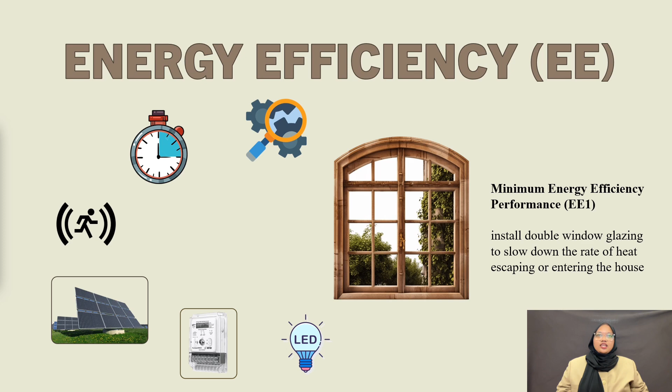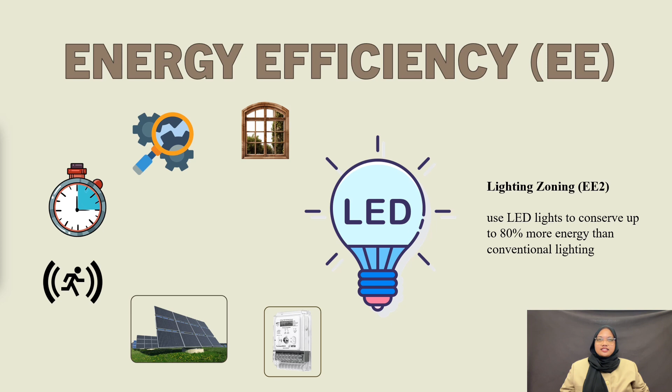For energy efficiency (EE), we will install LED lighting. LED converts a larger percentage of power into light compared to conventional lighting sources. To achieve the same brightness, they use a great deal less energy. This is because, to provide the same quantity of light, LED needs 75 to 80% less energy than incandescent bulbs on average.

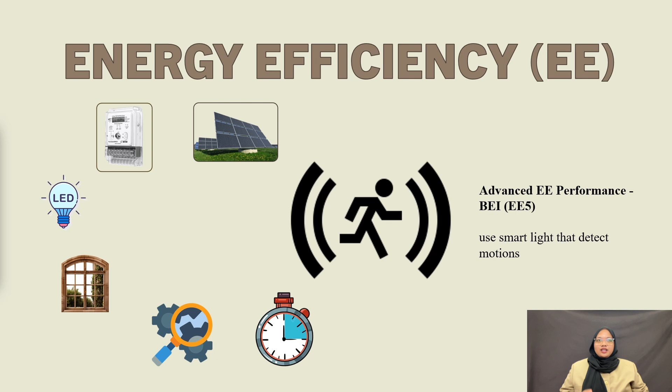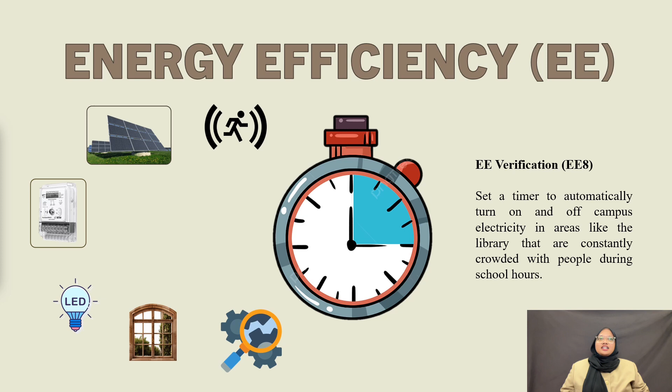LED lights also produce extremely little heat in contrast to incandescent bulbs, which release a significant amount of energy as heat. LED also have a longer lifespan, which lowers the need for replacement. Another example of EE that we implement in this school is utilizing double glazed windows and an electrical submetering system, solar panels, motion-activated smart lighting, high-performance HVAC system, automated timer system, and regular inspection.

Next, for indoor environmental quality (EQ), we will utilize smart glass. It can be used to automatically adjust the tint based on the degree of sunlight. Smart glass can reduce the energy consumption of buildings by regulating the amount of solar heat gain and natural light entering indoor spaces. It will also provide thermal comfort and lighting conditions for the occupants.

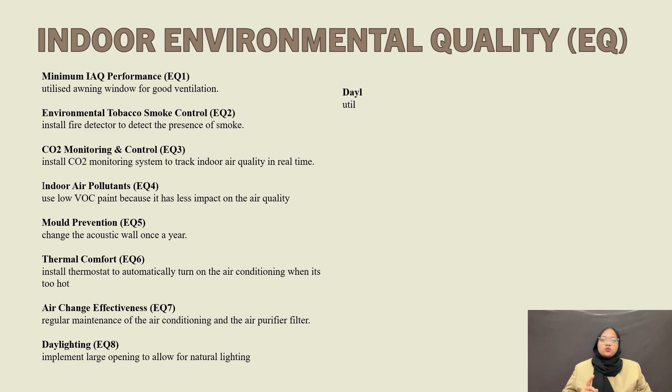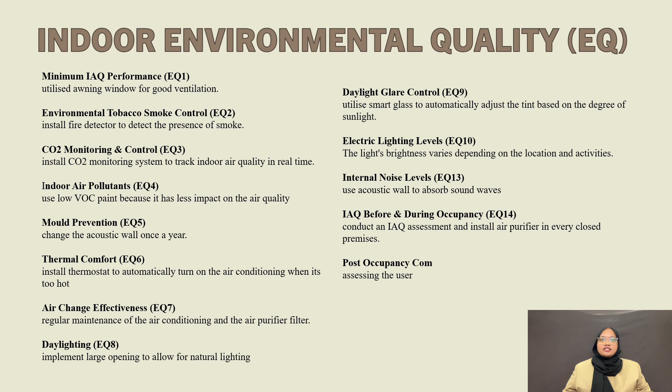Smart glass also offers privacy and security features for the occupants by switching from transparent to opaque mode. Other examples of EQ that we implement in this school are utilizing awning windows, smoke or fire detectors, CO2 monitoring system, low VOC paint, acoustic walls, thermostats, regular maintenance, and large opening.

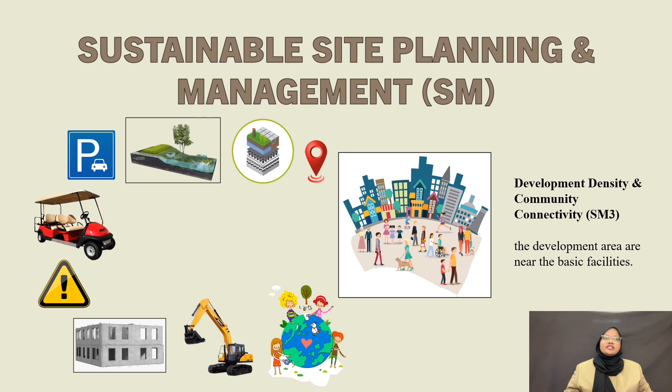For Sustainable Site Planning and Management (SM), this school will implement the Industrialized Building System (IBS) during construction works. IBS focuses on making building parts in a factory using the same methods. This is in line with the QLASSIC system, which needs to rate the work quality of the building.

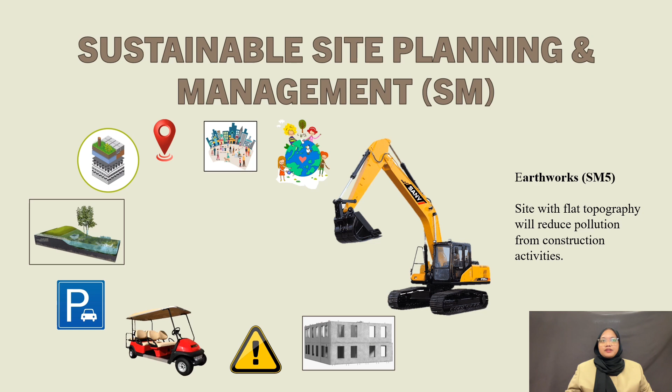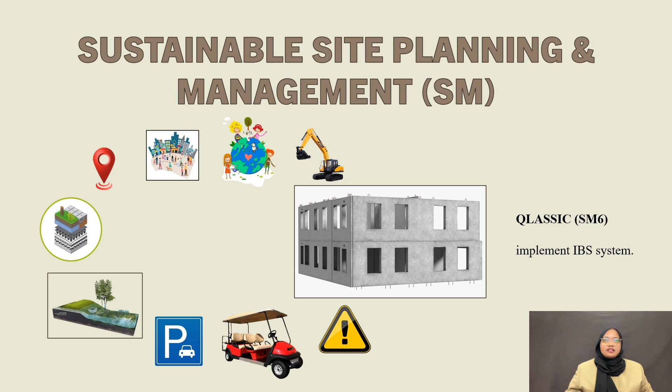IBS reduces error rates by fabricating building components such as beam, column, wall, etc. in the factory, and this implies fewer mistakes happen on site. As IBS functions similarly to an assembly line, it speeds up construction and lowers expenses. Building sites are quicker and produce less waste when IBS is used.

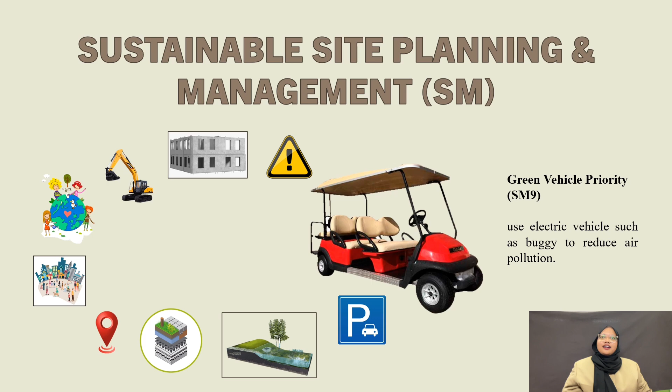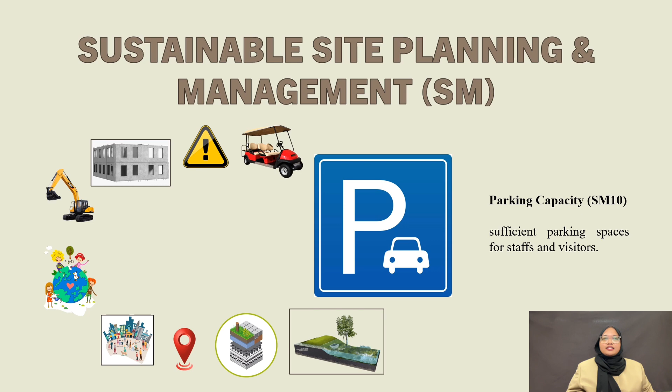Other examples of SM that we implement in this school are choosing a site with good feasibility study, near basic facilities and with flat topography, minimizing the building footprint, implementing the IBS system, providing clear signage at the site, using electric vehicles, sufficient parking, detention pond, and building's roof partially covered with plants.

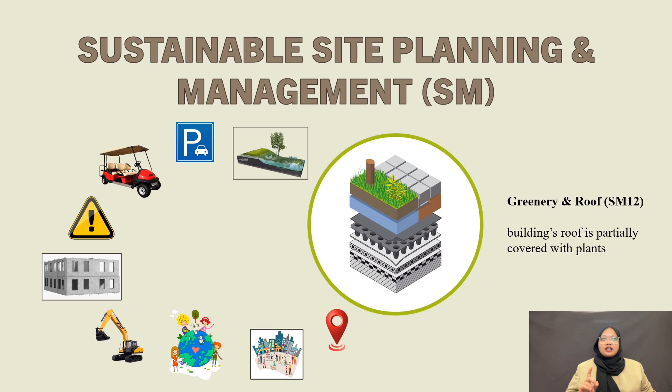For the materials and resources part, we're using recycled concrete aggregate (RCA). It is a material that is made from used concrete that has been crushed and separated from the mortar. It will reduce the consumption of natural aggregate, which causes environmental damage due to excessive mining and quarrying. It also improves the performance and durability of the concrete as it can provide higher strength, lower shrinkage, and better resistance to chloride penetration and carbonation.

Other than RCA, we also reuse the formwork, use aluminium foil for roof insulation, and provide recycle bins.

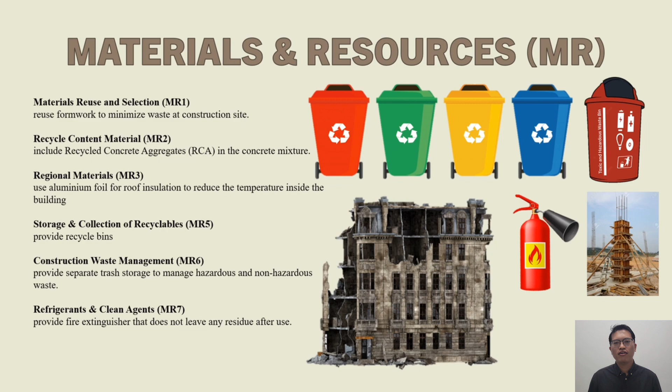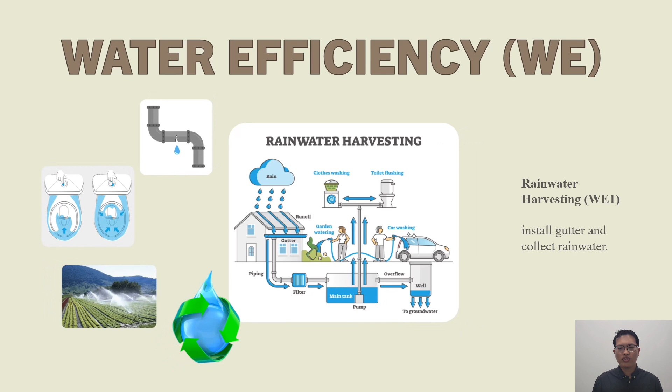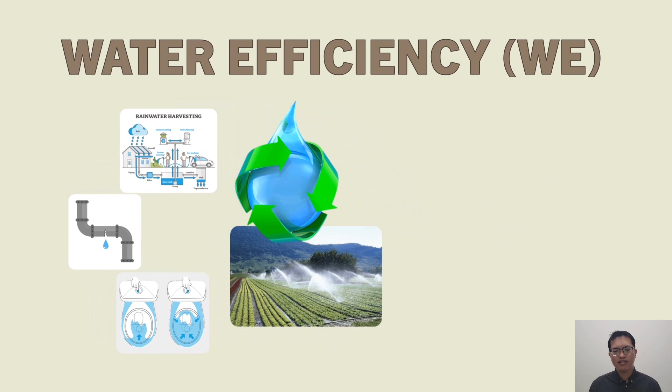For the water efficiency part, the toilets are equipped with a dual flush system and automatic sensor faucet. The user can choose between two flush options, one with bigger capacity for solid waste and the other one with a lesser volume for liquid waste. Compared to traditional toilets, which have fixed flush volume for each use, this flexibility lowers the total water use.

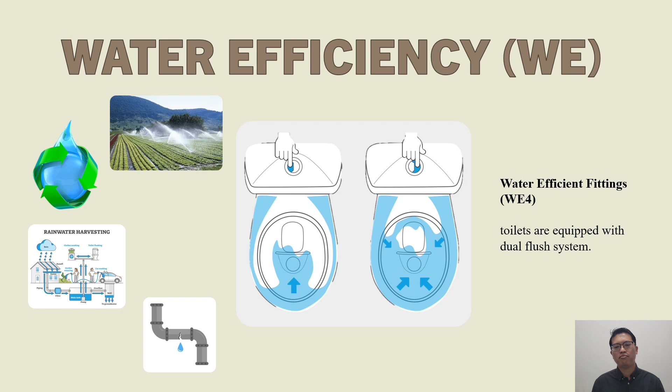The result will be cheaper water cost since it consumes less water per flush. Other than that, the automatic faucet can reduce total water utilization by up to 30% to 50%.

It requires less maintenance compared to conventional faucet.

And the last part for the innovation, our group will use the automated car park lift. When the car arrives at the entrance, the video camera captures the image of the license plate and assigns a parking space. The driver leaves the car and scans the QR code. Then the car is lifted by a platform and moves to the allocated parking space. The car is securely parked and the system records the time and duration of the parking.

When the driver returns, the QR code needs to be scanned again at the entrance to initiate the retrieval process. The car is lifted by the platform and moved back to the exit route where the driver can collect the car. It provides a high level of security and safety by preventing unauthorized access and theft of vehicles. It also avoids accidents and damage caused by human error and vandalism. It can lower the operational and maintenance costs by using less energy and resources than conventional parking systems, by minimizing the wear and tear of the vehicle and parking structures.

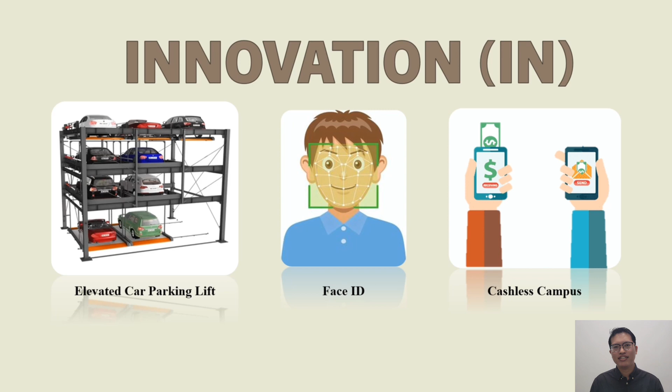Green buildings certified by GBI cost more at the beginning because they need special materials and advanced technologies. These eco-friendly things need more money upfront and experts to set them up. This makes clients worry about the initial cost.

To cover GBI certification costs, a smart plan showing long-term gains by calculating ROI is important. Also, using tax benefits, subsidies like Green Investment Tax Allowance, and financing schemes like Green Technology Financing Scheme make it easier to afford and encourage using GBI.

Architects aiming for GBI face a challenge balancing sustainability and aesthetic. For instance, creating a school with wide glass facades for a futuristic look clashes with energy efficiency goals, illustrating the struggles between balancing aesthetic and sustainability.

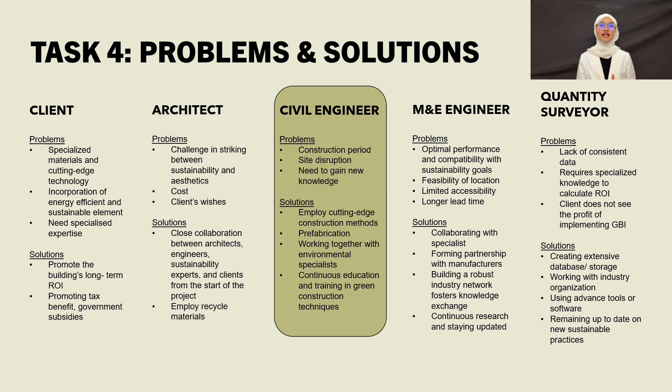Therefore, collaboration among architects, engineers, experts, and clients from project onset fosters a balance between design and environmental responsibility. For instance, solutions like double glazing or glare control maintain aesthetic while enhancing energy efficiency in scenarios like extensive glass facades. Civil engineers adhering to GBI standards face a clash between traditional swift construction methods and sustainable site design.

GBI's documentation and evaluation process conflict with speedy construction, leading to potential project delays. Other than that, extensive excavation clashes with GBI's focus on minimal site disruption and ecological conservation. As a solution, contractors can incorporate advanced construction methods like prefabrication to minimize site disruption and speed up timelines. Also, continuous education in green techniques ensures compliance without compromising quality or timelines.

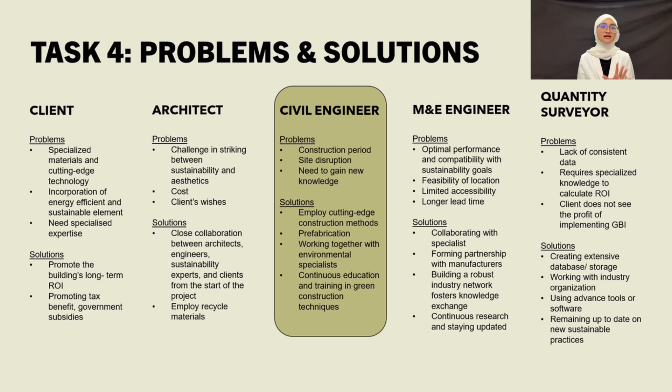The problems for M&E engineers are optimal performance and compatibility with sustainability goals, feasibility of location, limited accessibility, and a longer lead time. And for their solutions: collaborating with specialists, forming partnerships with manufacturers, building a robust industry network fosters knowledge exchange, and the last one is continuous research and staying updated.

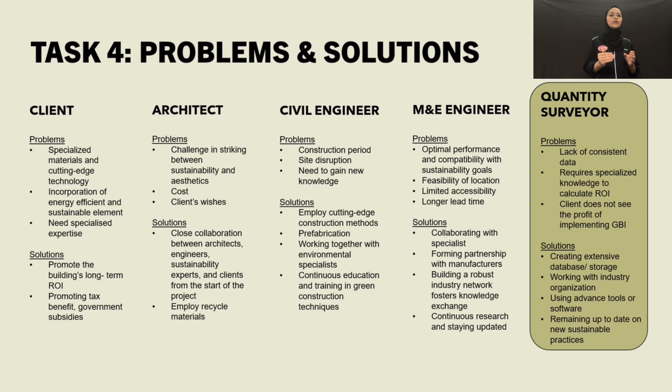And the problems for quantity surveyors are lack of consistent data, requiring specialized knowledge to calculate ROI, and the last one is clients not seeing the profit of implementing GBI. So for the solutions: creating extensive databases or storage, working with industry organizations, using advanced tools or software, and the last one is remaining up to date on new sustainable practices.

Return on investment is a crucial factor in green building. While initial cost can be higher, the ROI is realized over time through significant savings and benefits.

Green buildings are often certified by standards like the GBI. GBI certified buildings can yield energy savings of 30% up to 40% compared to average buildings.

Market value: green buildings can have a higher market value and attract tenants and buyers who value sustainability, enhancing the ROI.

Environmental and social returns. When considering the ROI for green buildings, it is important to consider not just the financial returns, but also the environmental and social returns.

Cost of sustainability design. Designing a sustainable school building using green construction features can be expensive, but every component of the structure supports environmentally friendly products.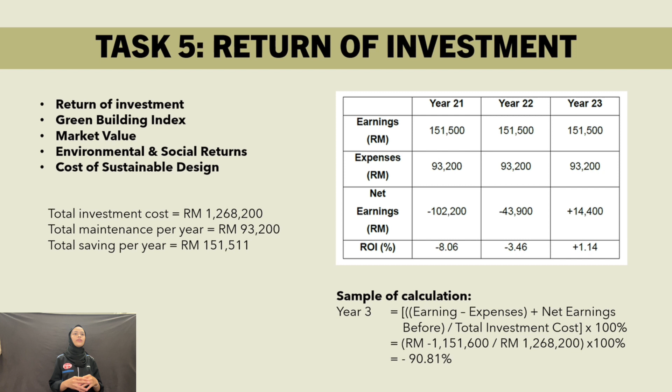So the total investment cost is 1,268,200 Malaysian ringgit. The total maintenance per year is 93,200 Malaysian ringgit. And the total saving per year is 151,500 Malaysian ringgit. For the sample calculation in year 3, the calculated percentage return on investment is negative 90.81%. This was derived from the formula which considers the earnings minus expenses added to net earnings before division by the total investment cost, all multiplied by 100%.

And the project becomes profitable in the 23rd year.

In conclusion, the Eco International School is leading the way in innovative construction, aiming to reduce climate change impacts by using renewable energy and resources. The school not only meets demand but also exceeds the advanced green building construction standards of Batu Kawan City and Malaysia. The school achieved a platinum rating in the GBI by scoring 88 points, indicating excellent practice.

Despite initial negative returns, the project became profitable in the 23rd year with an ROI of positive 1.14%. The Eco International School offers a valuable learning opportunity in all areas, including green building and construction management.